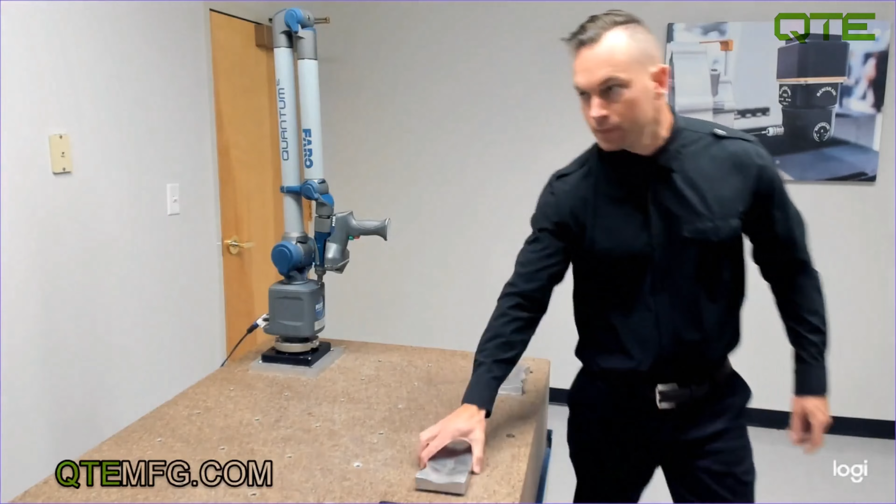Seek and destroy on surfaces. So we can do surfaces, and we can do the surfaces on the outside. It works really good on profiles. I'll show you an example here of what we can do.

So I'm just going to go in here and create a plan real quick. I'm going to make a plan and I'm going to do a surface grid right here. Settings, okay, so I'll just click on here. It put a nice little grid. I'm going to press done.

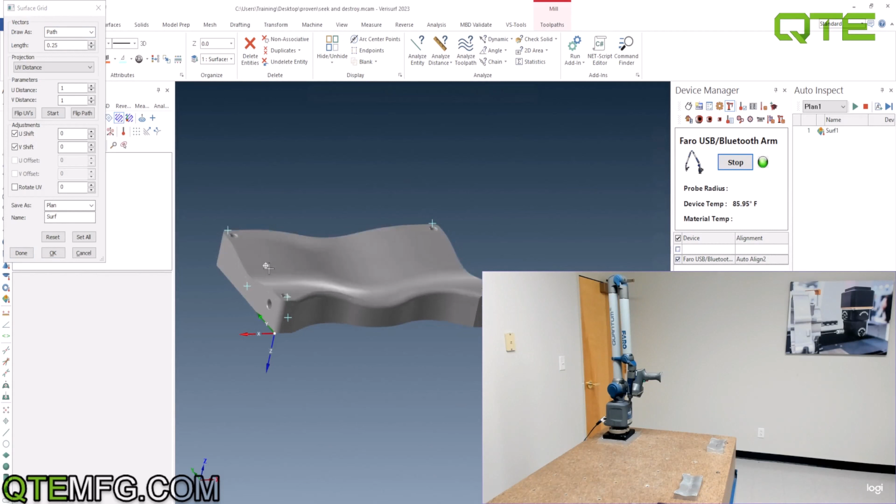And then what I can do is I can put one on the side. It might not work that great because I'm glued on the table. We can try and put one on here. Okay, so then all we're going to do is we're going to go over here and press play. And I have my settings so it picks all the points at once.

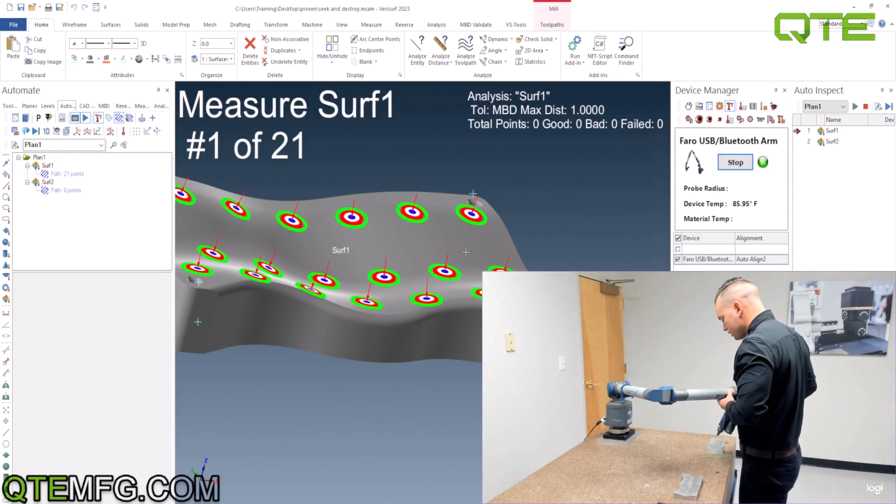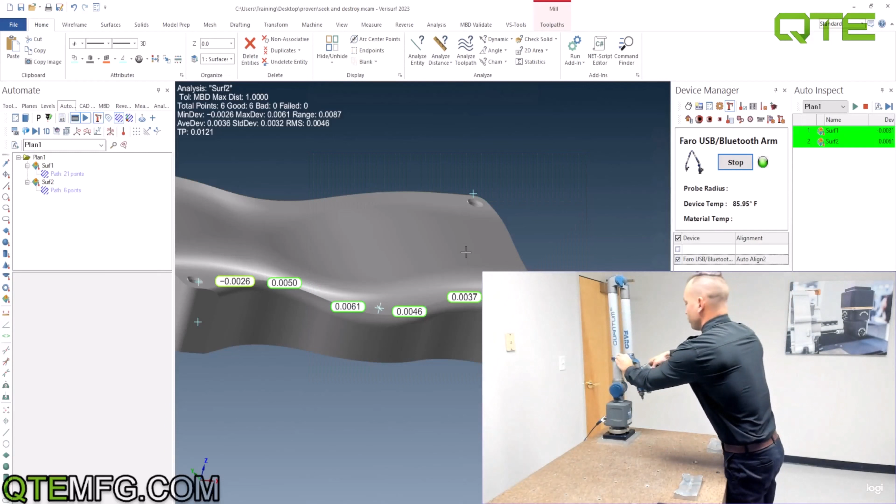If it misses something, you just kind of—okay, so we're missing one right there. Just sweep it across there, and that's it. It's pretty nice, and it's really quick. You don't touch the part, you don't scratch it.

It works really nice on machine surfaces, molds, and stuff like that. Stuff you don't want to scratch. If you're checking something that's finished, if you're checking something that has a coating, it's a pretty good technique of checking that stuff without doing any damage.